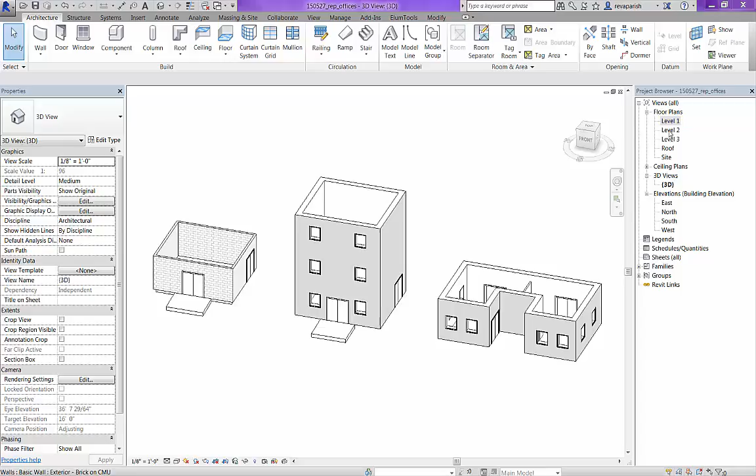I'd like to move up on this project to the next floor in terms of creating floors. So far, we've purely been creating floors on level 1. I'm going to move up to level 2 here, and if I double click on the level 2 floor plan, I'll set myself up for drawing floors on level 2.

If I hit my floor tool at this point, I'll probably be choosing a different floor because I won't be using a typical slab floor on here. Let's go down and see what this template has to offer us. I'm going to choose this steel bar joist 14-inch VCT, that's vinyl composition tile on concrete. And before I actually draw it in here, I will go underneath my edit type so you can see what the structure is on this.

I'm going to hit this edit structure tool, and we will see that we have a fairly thin composition tile that's on top of 3 inches of concrete, which is being held up by metal deck. That's the fairly thin support for it. And underneath that are steel bar joists that are the primary support for the floor.

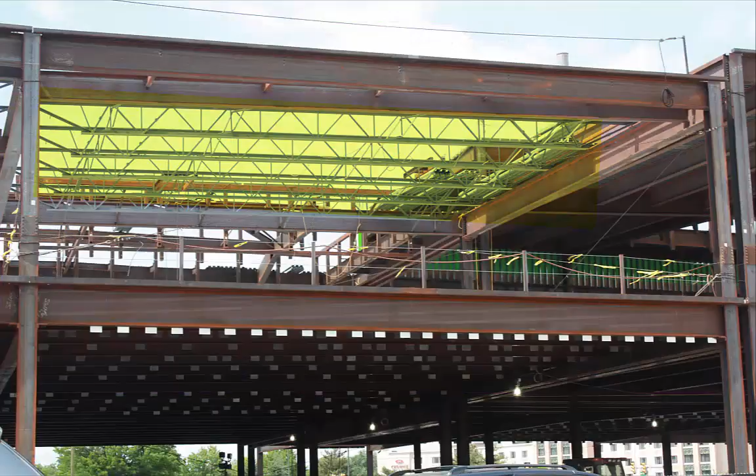So I'm going to show you a couple of photos here. This photo shows the steel bar joists. On top of that, running in the opposite direction, metal deck is laid down. Then concrete, in this case the 3 inches of concrete, is poured on top of that. And then once that's cured up, the composition tile is put on as a finished surface.

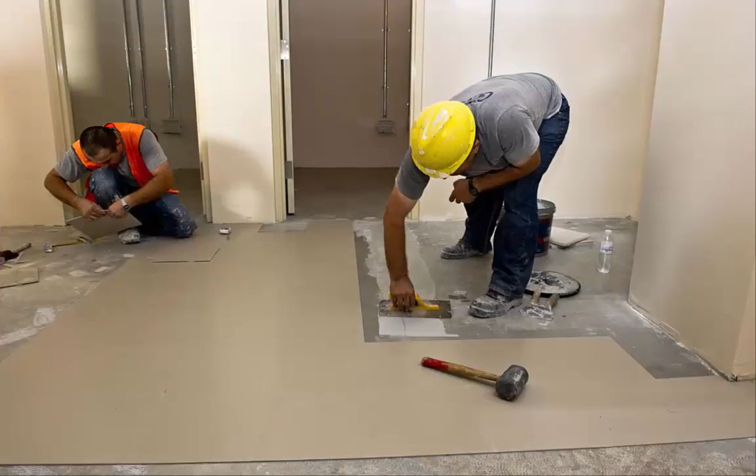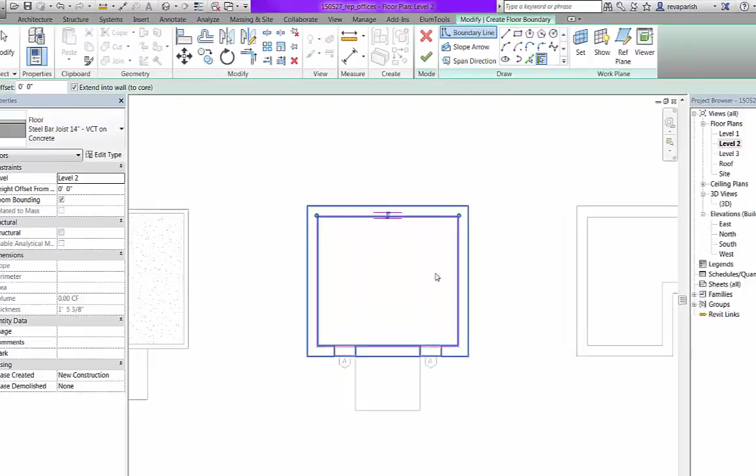So to go back to our interface here, I'm going to say OK within here to everything. And then with the default pick walls selected, I'm going to hover near the inside edge of this wall, and if I hit my tab key, I'll pick all 4 walls, and then I'm going to pick. Now, I haven't mentioned before, but the directionality of these 2 little lines that you see here shows the directionality that my floor structure is running in.

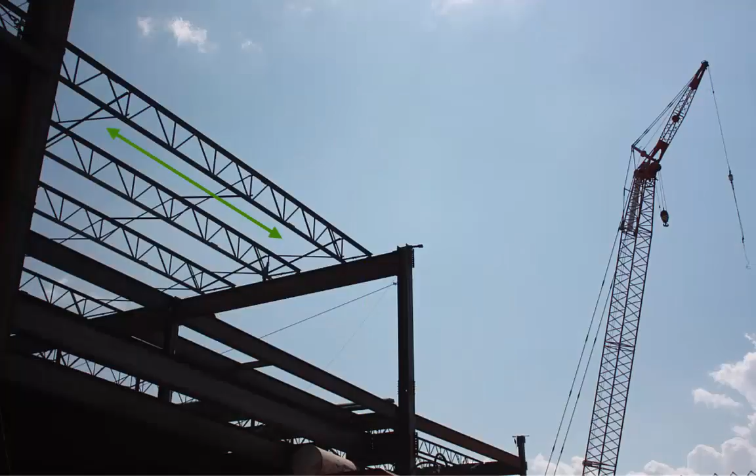If I click this Finish tool, I now have a floor. That floor represents the photo that we see here, where the floor is actually attached to the surface of the wall structure, and the wall structure continues on behind that attachment.

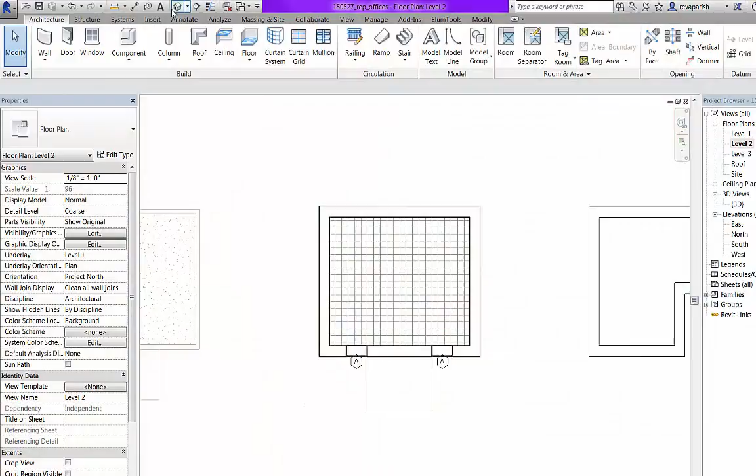If I go into my 3D view, I can kind of see that floor down in here, and you can even see that it has a surface pattern. It's a little hard to see exactly where vertically that floor is because I can't see through my walls. So, how to resolve that? Here is one nice, easily usable tool.

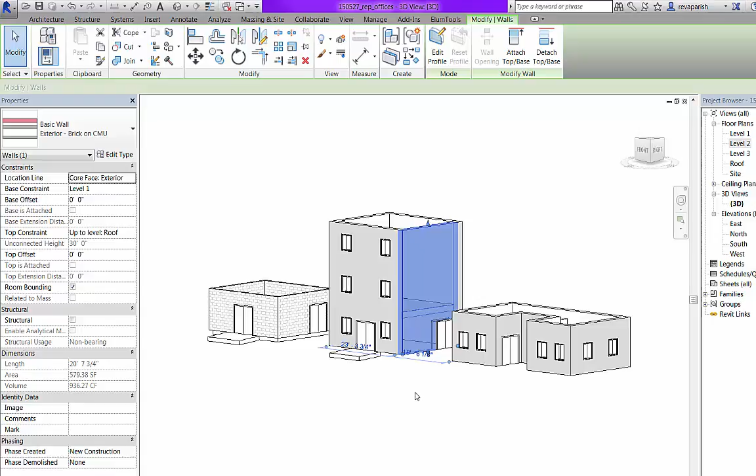If I pick on any object or objects inside my view, so here for example I'll pick on this wall, just by selecting something it becomes somewhat see-through. If I wanted to temporarily make this wall invisible, with it selected, there's a great tool here called Temporary Hide Isolate. It looks like sunglasses. If you pick on it, you can choose to hide the element. So now my wall's hidden. Now by element it means that one individual wall.

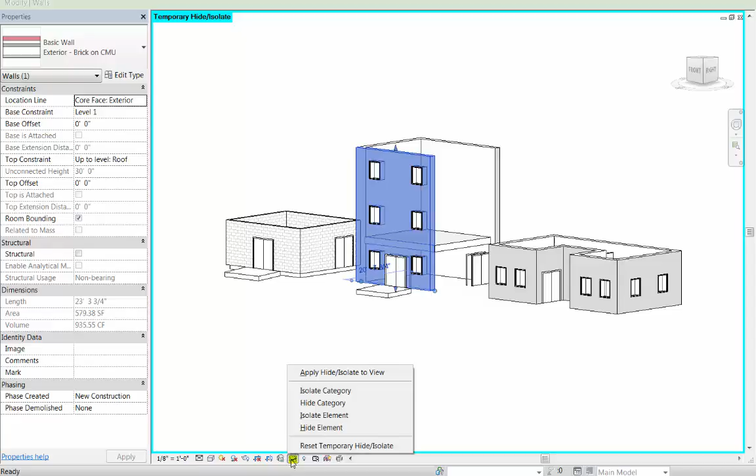I'll show you what happens if I pick on a different wall and go under this same Temporary Hide/Isolate tool and say Hide Category. It will hide all the walls within my project. My walls are a category within Revit. It looks kind of funny. Now I have a few floating floors and windows and doors in this project. I can zoom around and look at them.

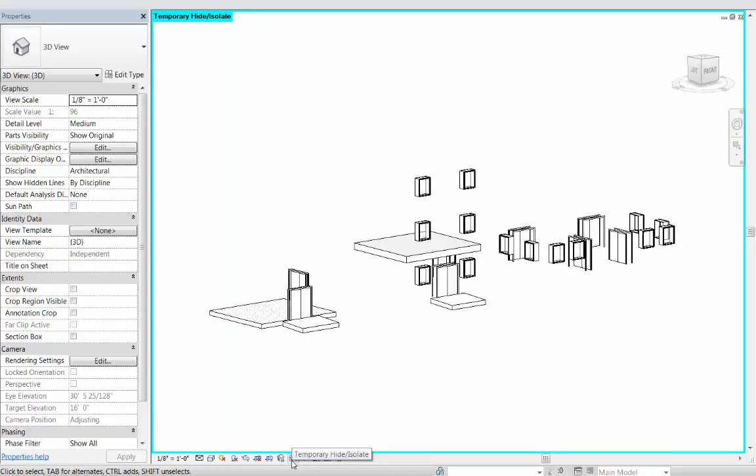I can always reset everything I just did. So these sunglasses, if you hover, they say Temporary Hide Isolate. It really is temporary. It's easy to turn this stuff on and off. To reset it back to showing everything, you just pick on it and you say Reset. That is a nice tool for just being able to see inside your project while you're drafting on it.